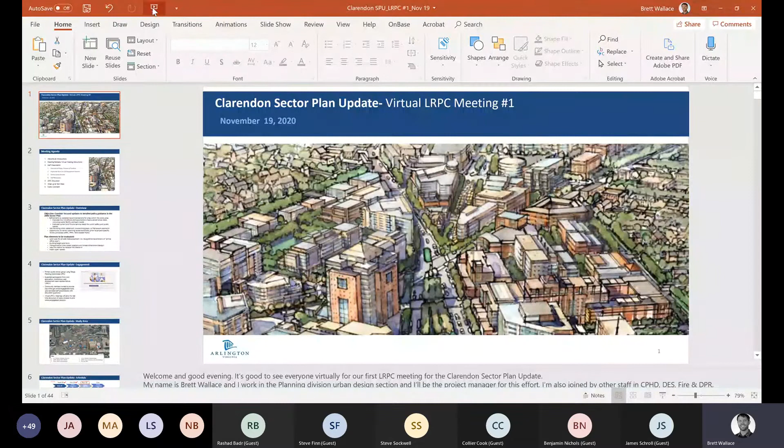Welcome and good evening. It's good to see everybody virtually for our first LRPC meeting for the Clarendon Sector Plan Update. My name is Brett Wallace, and I work in the Planning Division in the Urban Design section, and I'll be the project manager for this effort. I'm also joined by other staff in CPHD, DES, the Fire Department, and DPR. We're really excited to begin this process, and we're looking forward to working with everyone here. So with that, why don't we begin?

Before we get started, I know Mr. Schroll gave an overview of the agenda. As part of the staff presentation, we intend to go over the overview of the study, the process and timeline, some highlights from the October 29th engagement session. And then we're going to go over some of the online survey results that we received, and we'll have some staff responses to some of the survey results. Then we'll jump into LRPC discussion and wrap up with next steps and public comment.

So we want to begin by giving a brief overview of the study as a refresh and an intro for those that may have seen the online materials, but for those that didn't, that were posted in September and October.

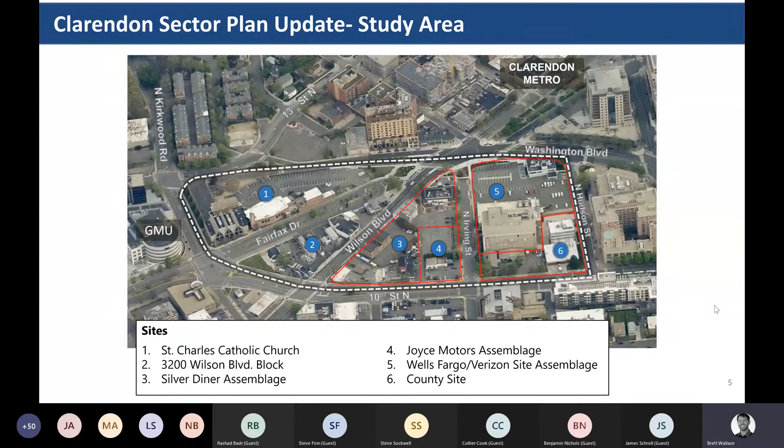Site 6 is the county-owned parcel, which includes Fire Station 4, the Fire Prevention Office, and the Clarendon House. In terms of site plan applications, we've accepted a 4.1 site plan application for the Joyce Motors site, and the Wells Fargo team has submitted a concept plan application. We anticipate an application soon from the Silver Diner team, and we expect the church will file sometime next year.

So now I'll pull out some of the highlights from the October engagement session before we dive into the survey results.

So in the October engagement, we discussed the fire station and public space opportunities. For fire, we provided fire response data, current station conditions, prior planning work. We went over sector plan guidance, siting and program considerations, and siting approaches.

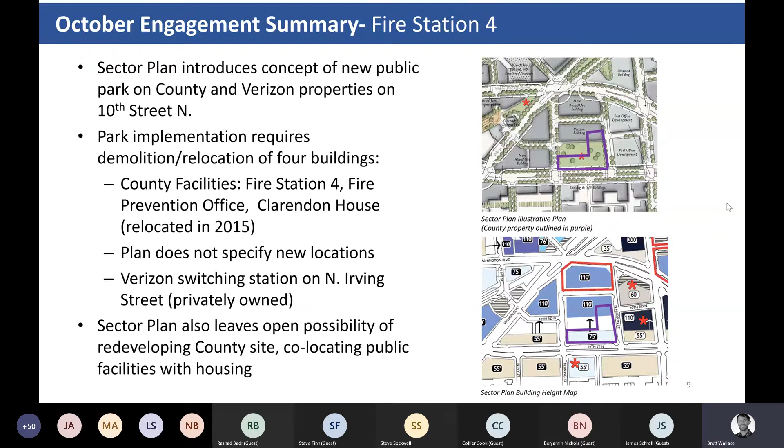For fire, we provided an overview of the sector plan guidance for the county's 10th Street site and the fire station, which included the concept of a new park on both the county and Verizon sites. Implementation would require demolition and relocation of the county facilities and Verizon building, but the plan did not specify exactly where they would go. The plan also leaves open the possibility of redeveloping the county site, co-locating public facilities with housing.

After outlining some of the program and siting considerations for the fire station, we presented 4 different approaches along with pros and cons for each to consider. The first was to rebuild on the current site, which would preclude the sector plan vision for the 10th Street Park. Number 2 was to look at other county-owned sites, which we determined did not meet the size requirements.

Number 3 was partnering with a private developer within the study area, and from what we've heard, the development teams have declined the county's request. Number 4 was land acquisition, where there are site limitations and cost concerns, which we'll go over in more detail later in the LRPC discussion.

Based on our analysis, staff's preliminary conclusion is that rebuilding Fire Station 4 on the current site best meets the fire department's program requirements.

We then provided policy guidance for parks and open space, looking at the recently adopted public space master plan as well as the sector plan. The PSMP includes an action for securing spaces envisioned in sector plans or other plans adopted by the county board, including the Clarendon sector.

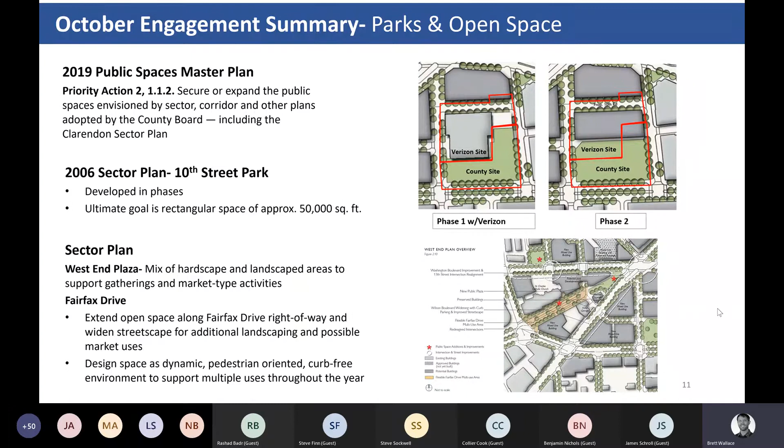Understanding that it may be difficult to achieve some of the sector plan goals, we're starting to think now about new opportunities for public space. We presented conceptual diagrams for potential ideas for both public and private sites.

A somewhat new idea that we presented is the concept of repurposing all or most of Fairfax Drive as a linear park space. This idea takes the sector plan guidance for Fairfax Drive a little bit farther, reimagining this space as a green spine that connects Virginia Square to Central Clarendon.

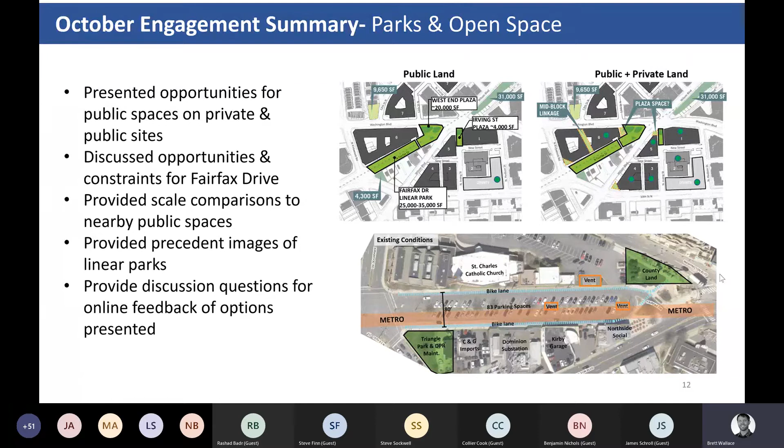To help understand this more, we discussed opportunities and constraints in the diagram below. We also provided some scale comparisons and nearby linear park spaces as precedent images, and included survey questions for online feedback, which we'll go over in a minute.

So now we'll cover some of the feedback we heard from the October engagement. We had a total of 121 responses, which is a good start, knowing there's a lot of interest.

Looking first at the demographic data, we asked what your connection is to the study. As you can see here, the majority of folks live nearby, which is good, or visit for retail or recreation. Of the respondents, the greatest number live in the 3 neighboring zip codes of 22201, 22207, and 22203.

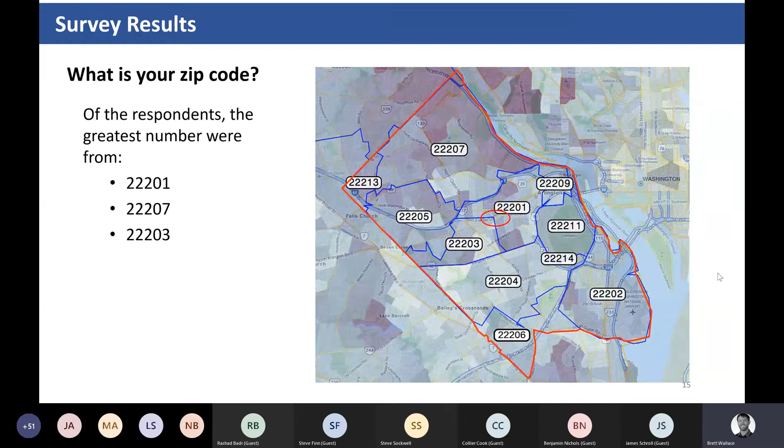Going back to the approaches that we had presented in October, we asked if there was agreement on staff's preliminary conclusion of rebuilding Fire Station 4 on the current site. Of the 84 that answered this question, 73% either agree or somewhat agree, with 24% either neutral or unsure. We'll revisit this again during the LRPC discussion later this evening.

We also asked the question, if the county rebuilds Fire Station 4 on site, would you support the county partnering with the developer to provide additional uses above the station? You can see that 76% of the 87 responses received either support or partially support partnering with the developer. We'll also cover this in our discussion later this evening, so we'll come back to these.

We had a few open-ended questions in the survey, so we pulled out some common themes in the responses. We asked if there are other approaches that should be considered in siting Fire Station 4, and saw some agreement with the approaches and considerations in the staff presentation. Some requested more information on alternative sites for land acquisition. We also saw a need to account for future population growth and traffic impacts on response times, and some questioned the size and number of public safety vehicles and whether that could be reevaluated.

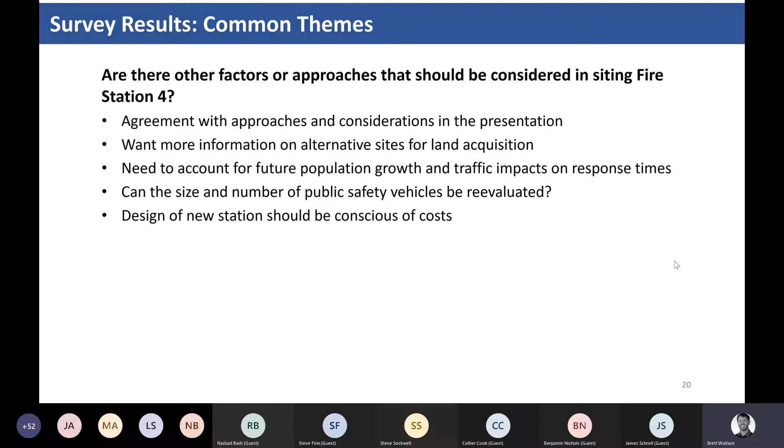The design of the new station should be conscious of cost. Here are some additional comments on rebuilding Fire Station 4 on the current site and possible co-location of other uses. We saw some support for rebuilding the station on site, strong support for co-locating uses including housing or affordable housing, public or community uses, some support for maximizing the allowable height and density on the county site, and some support for increasing planned density and building height to incentivize a private partnership similar to what we did with Fire Station 10 in West Rosslyn. There was also some concern about noise impacts from a fire station with housing above.

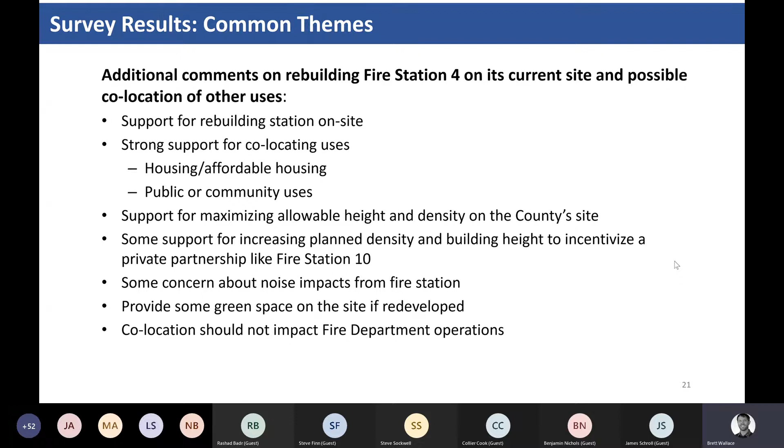Providing some green space on the site if redeveloped, and co-location should not impact fire department operations. We also wanted to capture some additional comments here, just a few of the many received. For reference, we've included a full set of comments on the LRPC and project websites covering all the survey responses. We plan to discuss a few of these in more detail soon, such as what other county sites haven't or can't work, land acquisition, clarity on some modern fire station standards, and concern about noise. We'll come back to these later in our discussion.

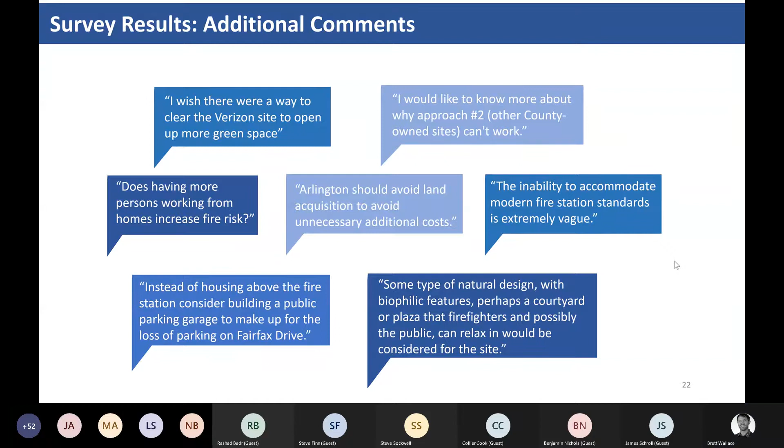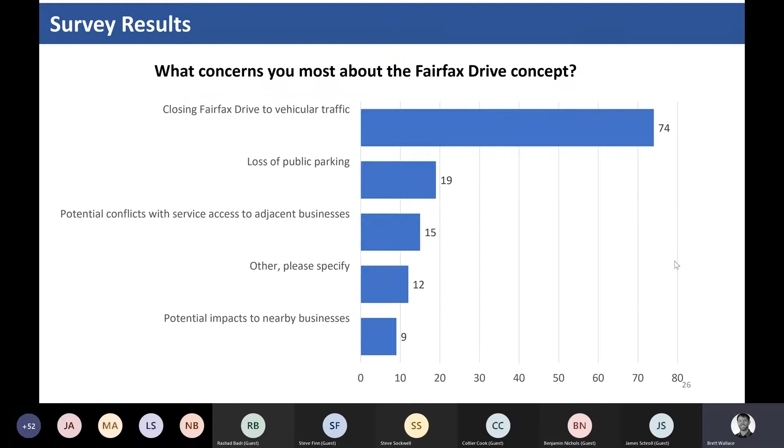We also heard why some people like the concept, for example providing better connectivity between Clarendon and Virginia Square, adding more green space and tree canopy, providing a central gathering space for Clarendon, reclaiming private vehicle space for public space, less traffic, and a more walkable pedestrian and cyclist environment. We also heard some challenges for implementing a linear park on Fairfax Drive, which we agree with: maintaining the bicycle connection, providing public parking nearby, and access to local businesses.

Last, we asked if there were other ideas that maybe staff didn't address in our presentation. We've captured a few of those ideas here that we'll address in the next section, such as repurposing North Irving Street right-of-way and continuing to look at private sites for opportunities.

So now we'll provide some preliminary staff responses to some of the feedback that we've heard, and then we'll jump right into discussion.

If we recall back to the fire station responses, one individual was seeking more clarity on the modern fire station designs. We've included a few bullets addressing those comments, including the quick flow from the dormitory and office areas to the apparatus floor for quick turnout times, the drive-through vehicle bays to improve safety by reducing backing-in movements, and isolating dirty or contaminated areas from clean areas to prevent the spread of carcinogens, energy efficient building systems and designs, and new program design elements such as privacy, fitness, wellness, and community space.

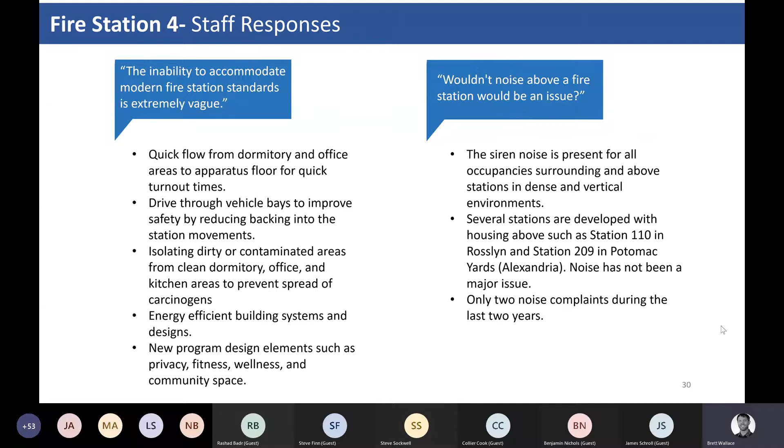In response to comments about land acquisition and why other sites in the RB corridor were considered, we included slides with maps showing travel times between stations to better understand why the current location works best. The first map shows current station locations, with green as the 2-minute travel time and yellow as the 4-minute travel time. The current location provides uniform 2-minute travel times in the corridor. Station movements should not increase modelled travel times more than 60 seconds, shown in the light purple polygon. And the station needs to be located on an arterial street.

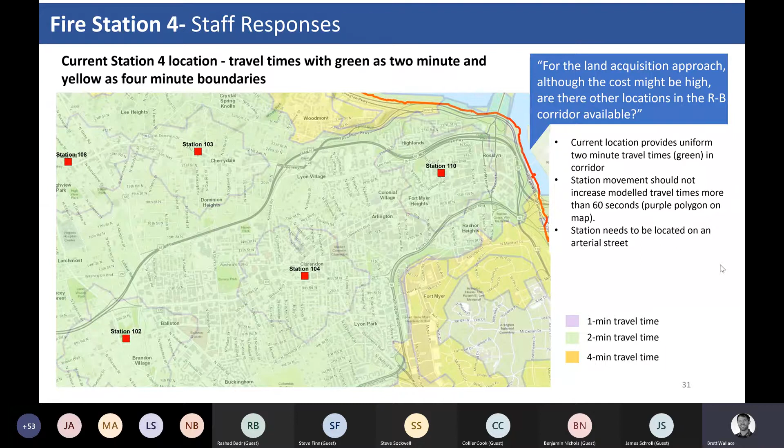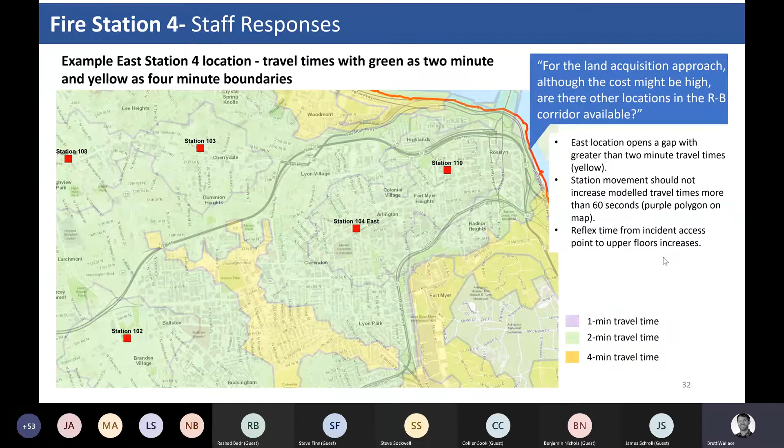The next two slides show examples of the impact if Fire Station 4 was moved to the east or west. This example shows shifting the station to the east. This east location would open up a gap greater than 2-minute travel times, shown in yellow, between the Ballston area and Clarendon area. Station movement should not increase modelled travel times more than 1 minute. The reflex time from incident access point to upper floor would increase — that's the time it takes to get to an incident on an upper floor of a multi-story building from the front door, so it just adds to the time. We can come back to these slides later for clarity or questions.

The final example shows impact to travel time if the station was moved to the west. The west location would again open up a gap greater than the 2-minute travel time, shown in yellow. Again, station movement should not increase travel times more than 1 minute, shown in the light purple polygon, and the reflex time would increase for those upper floor incidents.

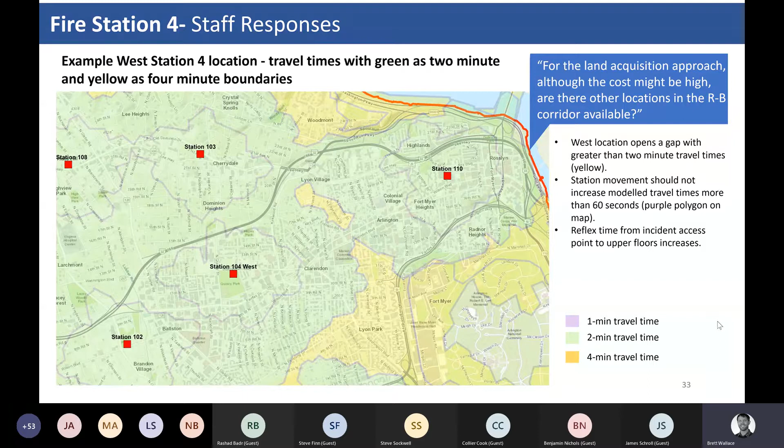On the topic of land acquisition, while there may be other sites in the area that could support a fire station, we realize the cost to acquire land is high, there's currently no funding available, and there's uncertainty for future funding due to COVID-19. For these reasons, as stated before in our preliminary conclusion, we've decided to focus our efforts on the 10th Street site.

Going back to the comment about why approach number 2 wouldn't work — approach number 2 looked at other nearby county-owned sites close to Fire Station 4. We looked at the sites shown here and determined they did not meet the size requirements. The program for Fire Station 4 requires an 18,000 square foot ground floor footprint and a 50-foot deep apron in front. As you can see, the other sites are smaller and in odd, less efficient shapes than the current site.

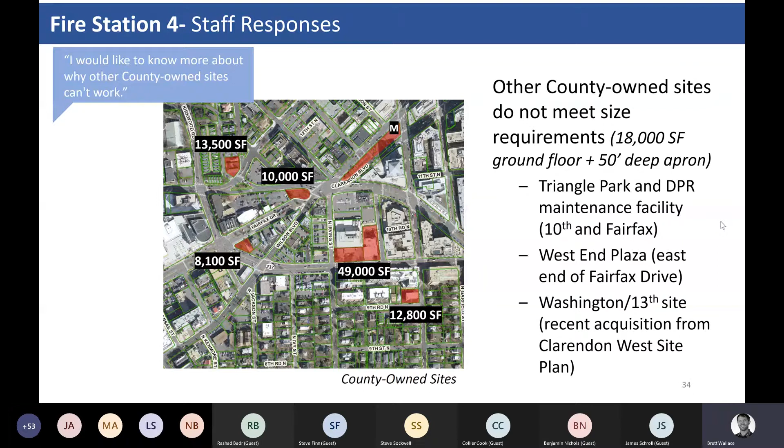We also wanted to provide more detail on the siting and program requirements. The table on the left lists all the interior spaces required for the ground floor of the fire station. We've also provided other requirements mentioned before, as well as updated health and safety best practices for fire stations, such as the need for contamination zones, maneuverability, and allocation of uses. Fire Station 4 is the central Arlington station and has more staff and units operating from it, so its footprint is a little larger than other recent fire stations like Fire Station 10 and Fire Station 8.

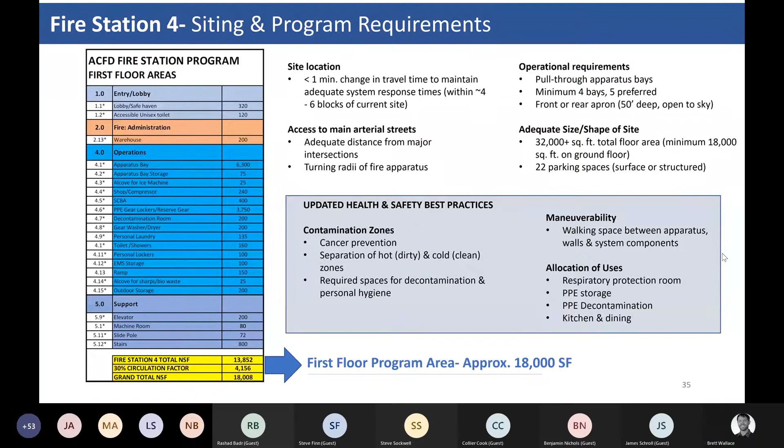Looking a little bit closer at the current 10th Street site, we provided a conceptual layout showing how a new station might fit on site. This concept shows a development footprint of 18,000 square feet at the ground level for a standalone fire station. Should the county partner with a developer to provide additional uses or mixed use above the fire station, the remainder of the site in this example may require additional ground floor lobby space, loading service areas, and structured parking.

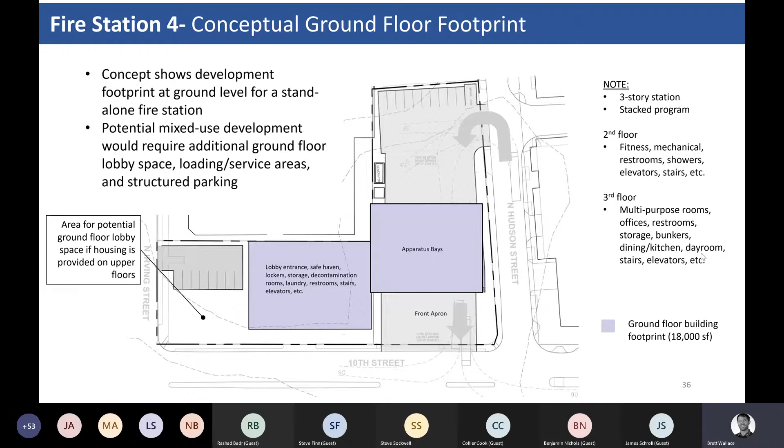We also want to note that in this scenario we would be considering a 3-story station, a stacked program with other uses on the 2nd and 3rd floors. Those are listed on the right-hand side of the slide.

Moving on to the open space comments we heard, there were a lot of ideas about repurposing North Irving Street, potentially looking at more opportunities on the private sites. This diagram shows the potential expansion of the existing plaza space at the north end of North Irving Street. We'll continue to explore this and all the options in future engagements and LRPC meetings.

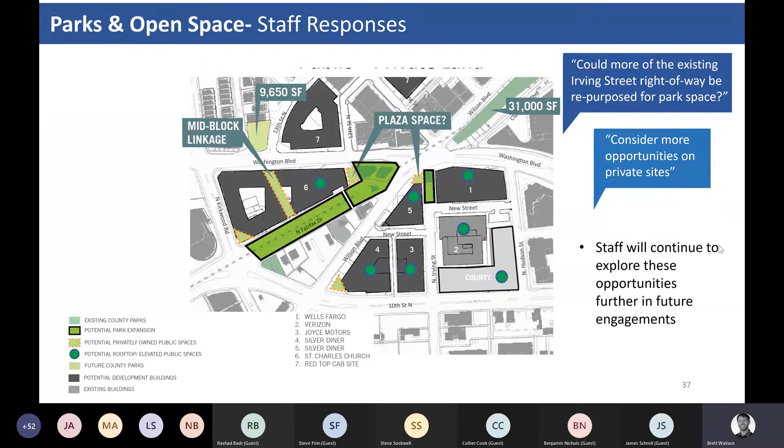We also heard from the survey challenges and concerns for Fairfax Drive, and we identified a lot of the constraints in this diagram. But we as staff need to further analyze this as we continue our discussions to see how any future design could support cyclists, because we understand this is an important link between Virginia Square and Clarendon. We also understand concerns about parking and access to businesses that we plan to review further in our next engagement session, where we'll look at the design of streets.

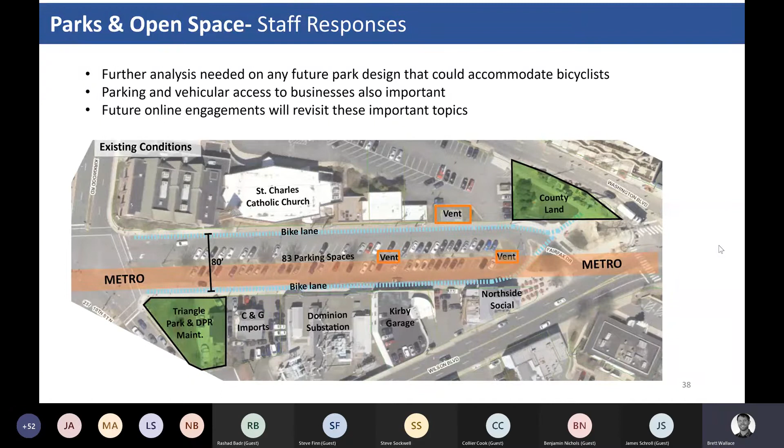So to close, we just wanted to bring people down to the street with these images of Fairfax Drive showing the existing condition, the scale, and the potential for the street. So with that, that concludes staff presentations. Thank you. Move into discussion.

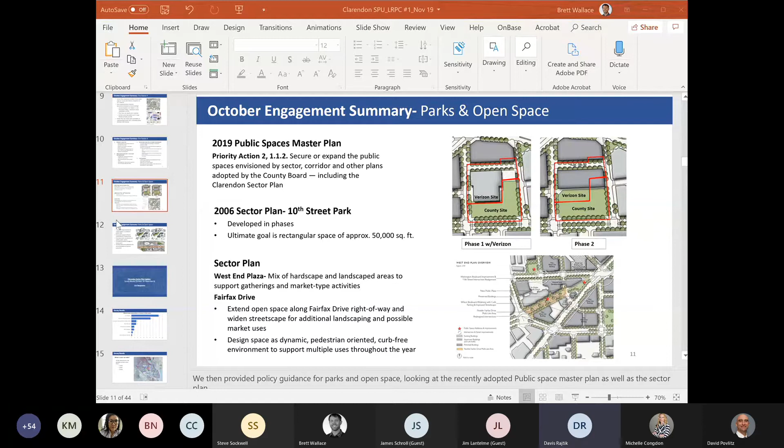Thank you, Commissioner Lantelme. Commissioner Rajtik, sorry. Thank you. I was wondering, I believe the county acquired Fairfax Drive from the Commonwealth several years ago, and I'm thinking my idea for maybe a potential alternative for the fire station would be siting it somewhere on that triangle park at the end of Fairfax Drive where it meets Kirkwood. I know a park is envisioned there, but there would still be room for some park. The opportunity would be it frees up that 10th Street site and keeps the arterials hopefully right where Chief Povilitz would want them. I don't know if there was any thought given to that. I know the Metro Tunnel adds sort of a wrinkle, but perhaps a single-story building wouldn't be as complicated as far as that goes. Thanks.

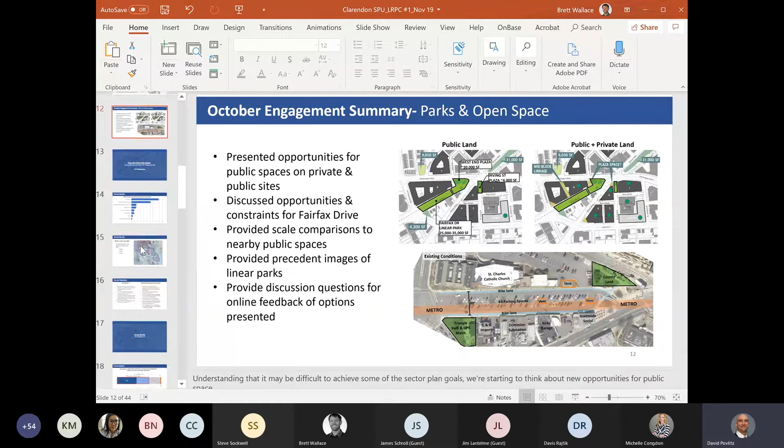Yeah, we did. This is Dave Povlitz, Fire Department again, and this also goes to Commissioner Sockwell's question earlier. We did look at several possible sites, within a 2 or 3 by 4 block area surrounding the current station, and we had a variety of criteria. Several things: number one, will it fit? Is there access to the arterials?

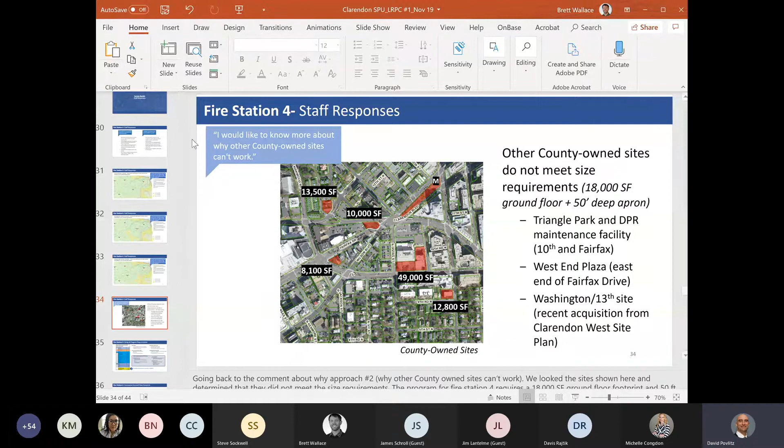Is it possible for us to have drive-through bays? We do not like to constantly back in where we have pedestrian traffic and numerous apparatus in and out, backing into the station. That's a more risky maneuver, and we do it anywhere between 10 to 20 times a day.

We did look at a lot of these facilities and sites, and it was very difficult to fit the program requirements on the site, along with the ingress, egress, and the ability to drive through. We weren't able to, we just didn't have a lot of options around that. Again, what's presented right now in the presentation is that, say, 4 to 5 square block area.

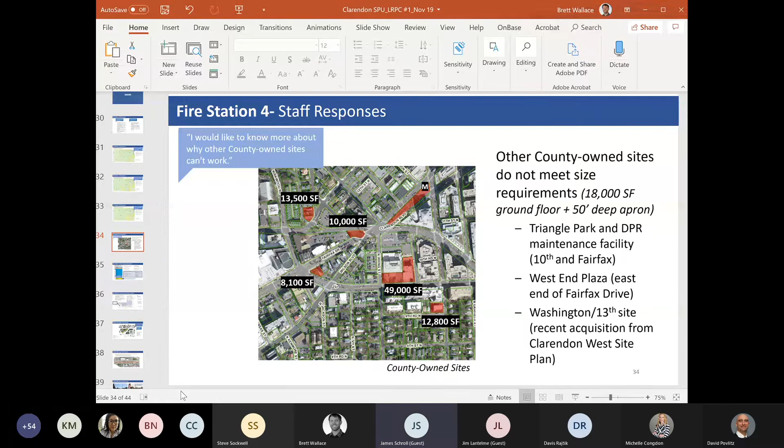Commissioner, do you have any follow-up questions or comments? No, that's all. Thanks.

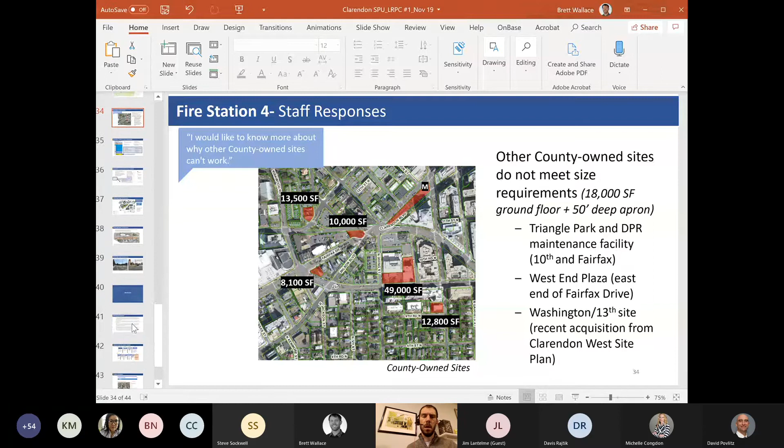Thanks. I saw some other hands that I think have gone down. Okay, if people have additional questions, we can certainly come back to this topic. But I would like to, for the moment, move on to the second question here.

Regarding what folks might like to see co-located here if a developer, if a partner were identified here. So would you like to see residential, would you like to see office, kind of what other uses do you think would be the most appropriate?

Commissioner Lantelme: I'd like to see housing here. We have a desperate need for it. It's walking distance to the metro, walking distance to supermarket. It's a great place for housing, and ideally affordable housing. I think they'll find a way to finance it. That would be my preference. If we can't get that, then certainly something else.

The county may also have other types of uses, office uses. Maybe APS might be interested. But housing would be the first thing. Thank you.

Thank you, Commissioner Lantelme. Before I move on, it is a little tough to hear you, so prior to making further remarks, I'd ask you to address that. Commissioner Morton.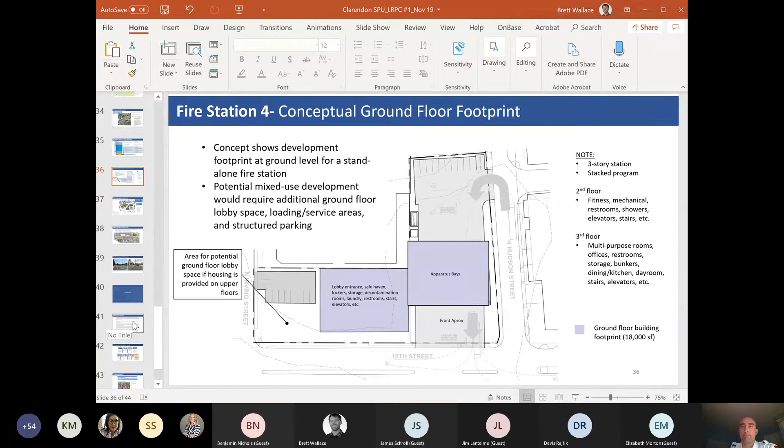Before I move on - for those ladder extensions you're doing, are you extending it the full way, or just partially? It could be both, all the way or partial. It depends on the needs and what needs to be checked.

Commissioner McSweeney, and then Commissioner Morton, I think you still have your hand raised.

Thank you. I'm glad you said that about Commissioner Lantelme, because I didn't hear his comment, but it sounds like he said affordable housing. I did want to echo that as well. Because it's located near Metro, there isn't a lot of affordable housing in the area. There are some several blocks away, but this is a pretty dense area, and I don't think there's a lot of affordability here. I would say trying to mix generations would be great too. One thing we've heard about over the last couple years is the lack of affordable housing for people who are retired or elderly. Having that in a place like Clarendon would be great, because the elderly may not be driving, but they could walk to amenities, restaurants, Trader Joe's, that sort of thing.

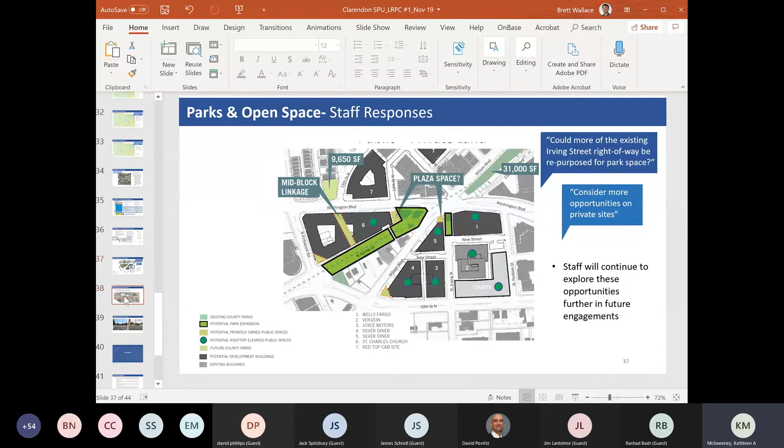Thank you. If memory serves, there are two car-centric businesses that are near Northside Social. There's C&G, and I can't remember the other one. Ah, there it is - Kirby Garage, is that what that says? And so my question is about the entrances to those. Are the entrances to those purely from the Fairfax Drive side, or is there actually an entrance to those on the other block?

Yeah, this is Brett. I can respond to that. So the entrance for the C&G Imports is off of Fairfax Drive. There's not an entrance from Wilson Boulevard. And then for the Kirby Garage, the space that I'm showing here with my cursor, this is all at grade, so there is access to Kirby Garage from Wilson Boulevard and also Fairfax Drive over here.

Okay, thank you. And I frequent that area quite a bit, and I would say there are a lot of cars parked on the Fairfax - in fact maybe even the last picture you showed, there are a lot of cars that I think belong there. So there would have to be some sort of access if it's their property that they're parking on. But in general, notwithstanding the comment we just heard from Mr. Badr, I personally love the idea of at least a strip of that being green, a green connector.

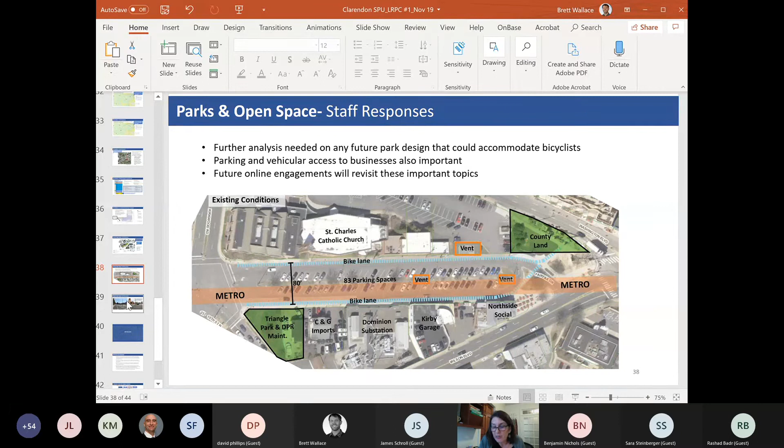Sorry, thank you very much. I would like to echo Commissioner Steinberger, perhaps supporting a limited amount of parking, but it doesn't need to look like this. We generally discourage this so close to the metro for most projects, so I'd love to continue that practice. I do endorse the idea of a linear park, in part, like was stated, it is in the plan as proposed to be green and some sort of festival type activity.

Thank you to Mr. Badr. I was going to ask him this. I thought I had understood that the church was planning to accommodate its own parking needs on site, and in fact, maybe even on your website, you talk about perhaps providing fee parking. I know it's premature to talk about your specific proposal, but it kind of seemed like you were anticipating an excess of parking that you could lease out to other people.

Mr. Badr, if you would like to comment on where the church is now with its planning, please feel free to do so. Obviously, if you have not gotten to that stage, you can also.

Yeah, sure thing, Commissioner, and thank you, Commissioner Morton. It's good to see that you're reading the materials closely. What those materials said was actually some of the feedback we had received from parishioners. Parishioners were excited at the prospect of possibly offering paid parking on the site. So it's too early for us to speak to having that sort of excess parking-wise in the future. Naturally, for our purposes, we are planning for that sort of underground parking, but like you said, it's too early for us to say that. It was just enthusiasm on the part of our parishioners when we conducted an online engagement. But thank you for the question.

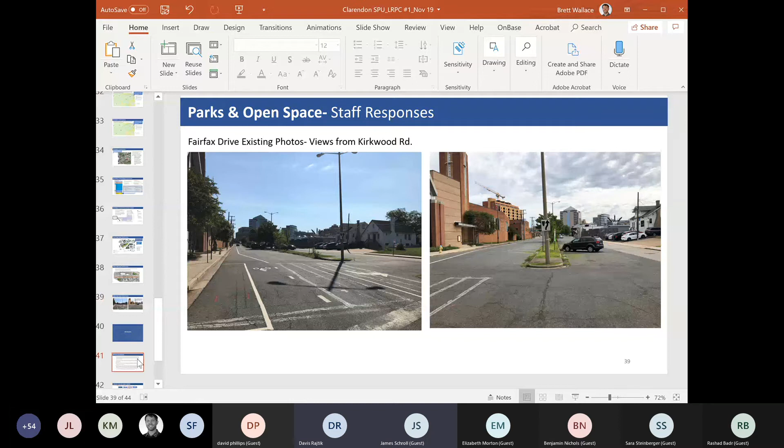Thank you. When we were looking at the overhead aerial view, it strikes me that the biggest landowner here is St. Charles Church. I'm hearing, and I'm sorry I haven't read as much as Commissioner Morton has, so I'm not sure what your proposal looks like. But I guess I would encourage us, if there is some sort of assemblage of buildings that would make sense. And I heard you say, Mr. Badr, that the church might move to the east, near where that county land green space might be. I'm just wondering if some juggling of land might help the situation, and I would hope that St. Charles and the county might be open to that if it creates an opportunity somewhere else, maybe closer to Washington Boulevard, or to create a strip of green space as well. Just kind of think creatively is what I'm encouraging us to do. So if there is some sort of land swap, moving St. Charles more into Fairfax Drive, since it isn't really a through street, could create some different possibilities in this area. I would encourage us to think about it.

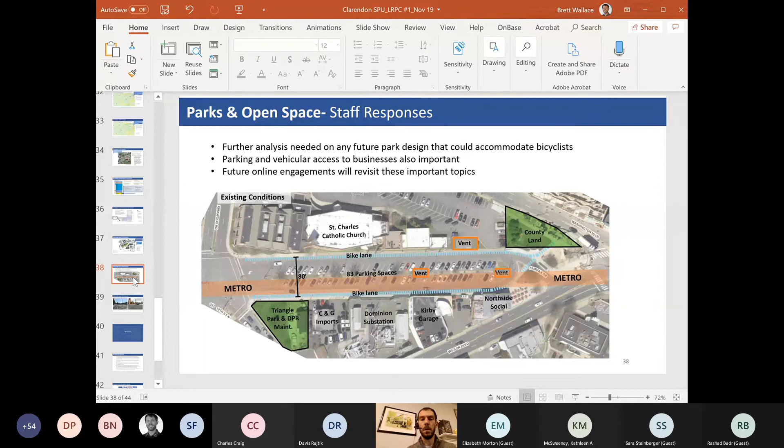All right, so we've heard a lot of concerns about this space. I want to briefly pivot, and we've heard some from folks about what they think would make this space useful, attractive. So we're getting towards the end of our discussion. We have kind of answered some of questions 4 and 5 a little bit. So if there are folks who had comments that maybe they felt fit better under questions 4 and 5, they want to raise those now, please do so.

What I'm hearing is an openness to consider an expanded linear park, even by some of the adjacent property owners, and certainly a concern about access and about some retention of parking. So that's what I'm hearing.

If people did have other things that they wanted to raise, now would be a good time to do so. And as Mr. Wallace noted, we will be hearing more about this in subsequent meetings. So when we discuss next steps, hopefully we can touch on this again, but in upcoming meetings we're going to talk more about streetscape and about open space. There will be further opportunity to provide feedback on these issues, and they will get further refined as well.

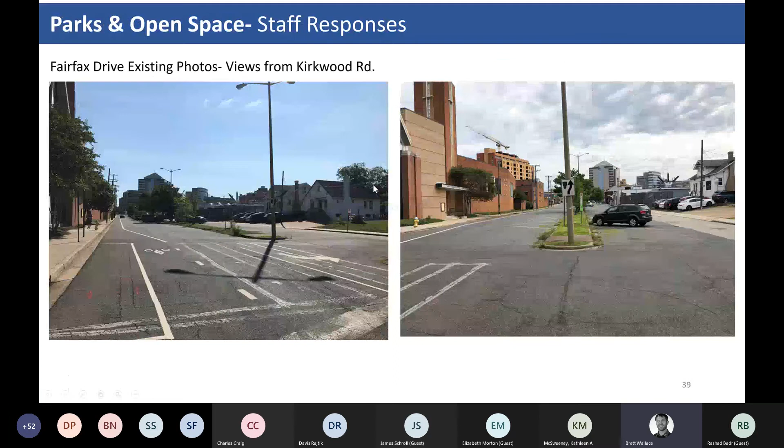So yeah, we looked at the schedule earlier, and here we are today, November 19th. This is our first LRPC. Again, we've talked about the fire station and the public space opportunities. We're looking ahead to December, where we would post another recorded staff presentation where we would go over the private development proposals. We'd also be presenting some 3D modeling to show some sector plan deviations from the applicant teams and talk through some of the pros and cons of that. So again, we'll be looking at each of the sites in greater detail.

But we'll also be starting our conversation on some of the new street locations that are being proposed and looking at some of the streetscape and cross sections on some of the dimensions and design. And I think we'll certainly talk more about Fairfax Drive. We have a lot of folks in our transportation staff that are very in tune to this concept, and so we'll want to explore that a little bit further in that engagement.

And then looking into the January, February time frame, looking to post yet another presentation where we'll start to look at building height and form. And again, we would come back and revisit some of the public parks and open space based on some further analysis. And then we would follow up in the first quarter of next year with another virtual LRPC meeting where we would, again, look at those agenda topics from the online engagement sessions 2 and 3.